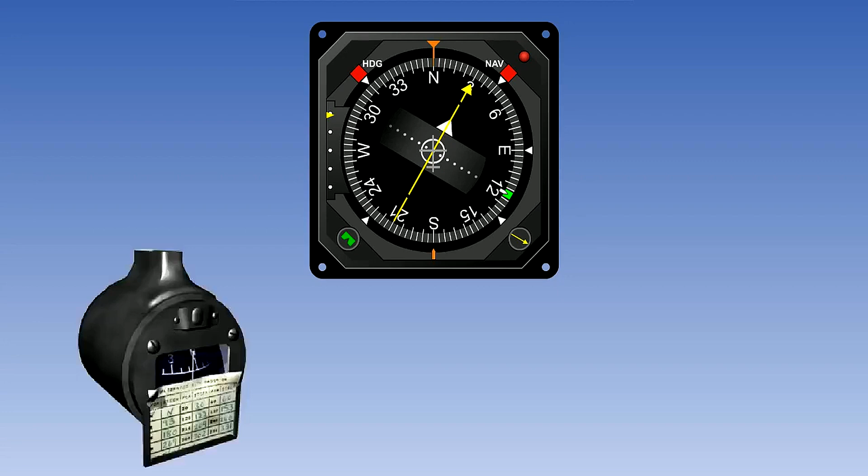This is the first of three lessons on the gyromagnetic compass. The gyromagnetic compass is an instrument which evolved out of the need to overcome the limitations of both the direct reading magnetic compass and the directional gyro indicator. We'll start by reminding ourselves of these limitations and then go on to see how the design of the gyromagnetic compass removes or eliminates them.

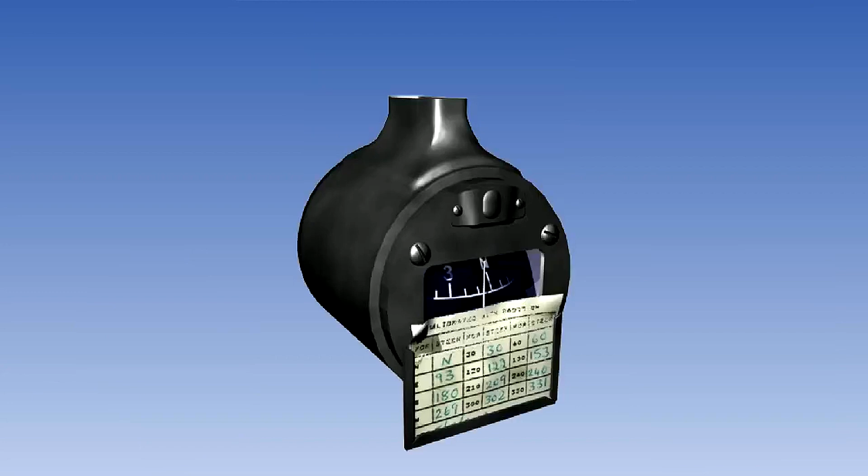The direct reading compass has three major limitations. These are: firstly, turning and acceleration errors. The compass cannot be read accurately during a turn.

Secondly, the magnetic sensing element, that is the group of magnets on the vertical card, is contained within the instrument and has to be situated close to the pilot so that the card can be seen. Unfortunately, the cockpit area is close to sources of deviation, such as electric lights, electric motors and ferrous metal.

Finally, it is a standalone system. The instrument is self-contained. It is not possible to take magnetic heading from it as an electrical or mechanical input into other equipment, such as those which display bearings from ground radio beacons, the autopilot and the flight data recorder.

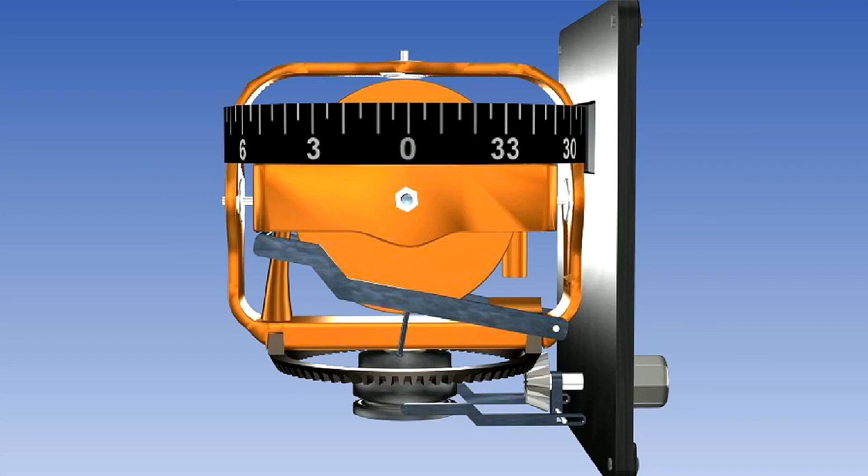The directional gyro indicator attempts to solve some of these problems by use of an air-driven or an electro-mechanical gyro. Turning and acceleration errors are eliminated and outputs can be taken to other equipment, for instance to display radio bearings. However, there is no magnetic input to the heading, and no correction except by the pilot manually synchronizing to the direct reading compass at regular intervals.

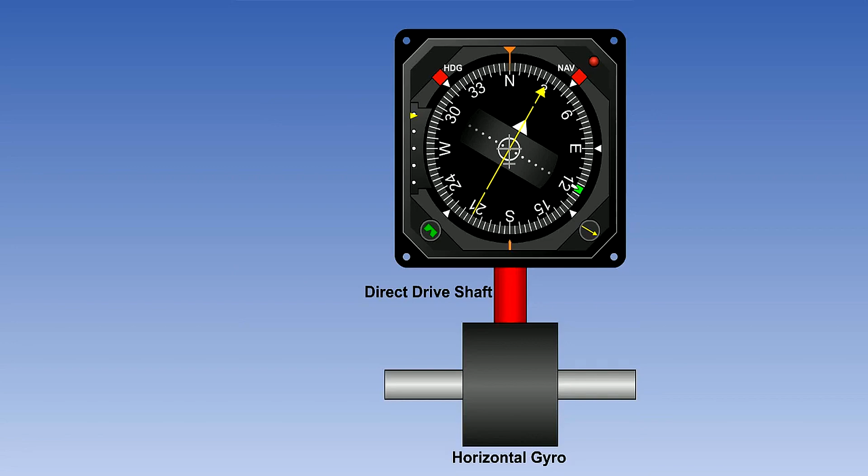What is required is a system which combines the best of both. The short-term rigidity of the gyro overcomes turning and acceleration errors. This needs to be combined with the longer-term monitoring of the Earth's magnetic field, so that if the gyro starts to drift, a servo system slaves it back to alignment with a magnetic input. Such a system is called a gyromagnetic compass.

The gyromagnetic compass is known by several names. It can be referred to as the gyromagnetic compass, remote indicating compass, slaved gyro compass, magnetic heading reference system. They all mean the same thing.

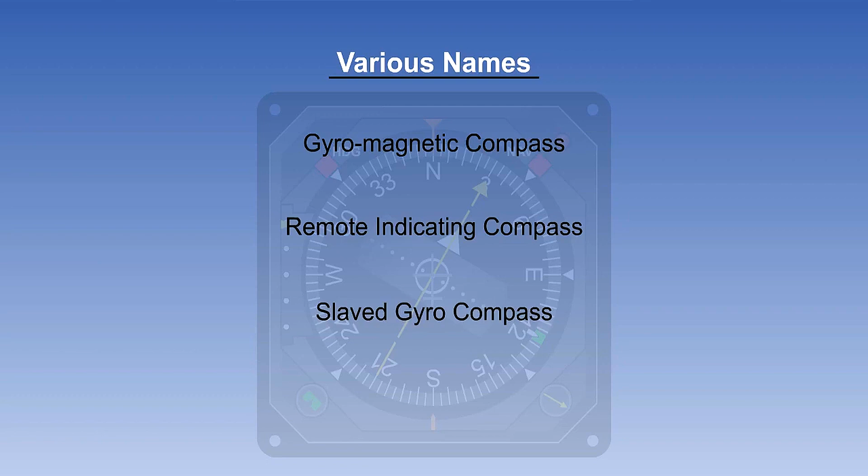A more modern version, which often includes other functions, such as the display of VHF omnirange, usually shortened to VOR, is known as the horizontal situation indicator, or HSI.

The system comprises the following elements: a magnetic detector unit. This is also often known as a flux valve or a flux gate. Note that it is usually mounted on a wingtip or on top of the fin and is therefore well removed from most of the sources of deviation.

A compass indicator dial. This is what most people refer to as the compass. A precession amplifier, this may also be known as a slaving amplifier. A precession motor, this may also be known as a slaving or synchronizing motor. And a horizontal gyro, similar in principle to the one used in the DGI.

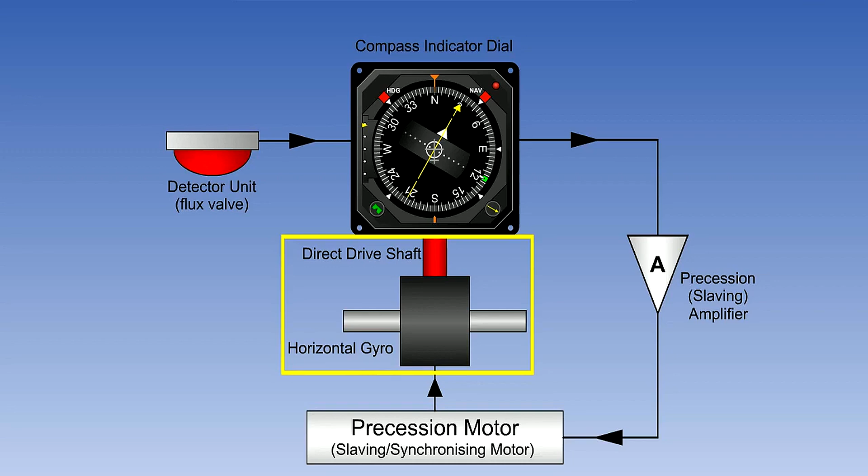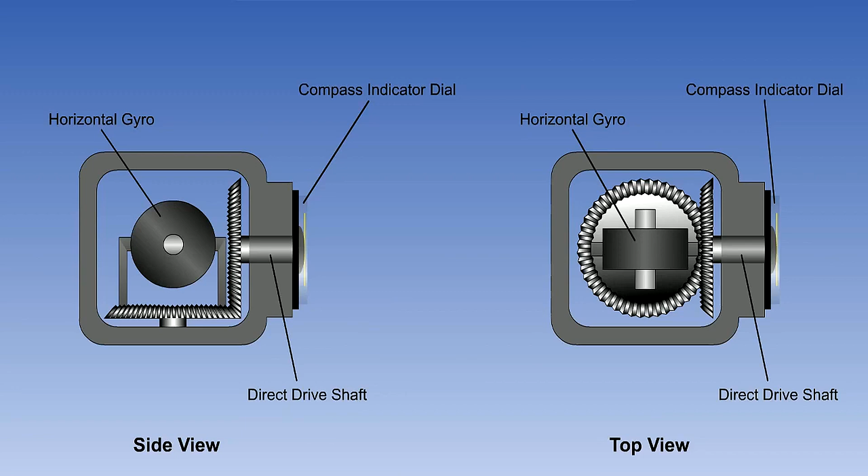In simple systems, the horizontal gyro is directly connected to the compass card of the indicator dial through two cogs, which change the rotary motion through 90 degrees. This is called a bevel gear, and it works like this. We are assuming our gyro is connected to the compass indicator dial by a bevel gear in the description which follows.

The purpose of the detector unit, or flux valve, is to sense the Earth's magnetic field and reproduce it within the compass indicator. We will explain how this is done later.

At this stage, we'll just say that magnetic heading has been detected electronically and passed to the indicator in the form of alternating current, or AC. We'll also assume that the compass has already been initially synchronized in order to make the gyro drive shaft output the same as the flux valve. Again, we'll cover how this is done later.

In the compass indicator box, the flux valve output is compared with the position of the gyro drive shaft. This is the shaft which positions the compass card indicator, that is the heading shown to the pilot. If the two are aligned, no further action takes place. The compass card is reading the right heading.

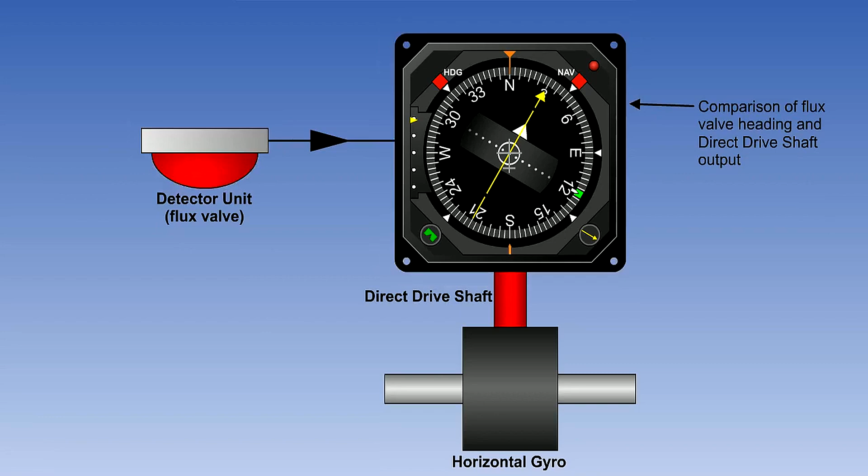We'll assume a steady heading, which gives a steady input from the flux valve. From this point, any difference between the flux valve field and the gyro alignment would only arise if the gyro were to drift. If this happens, the drive shaft will not be in alignment with the flux valve field, and an AC error signal is generated and passed to the precession amplifier, where it is amplified, phase detected and rectified to direct current, or DC.

The DC signal drives the precession motor, which turns the gyro. This gyro output is fed via the direct drive shaft to the HSI for comparison with the flux valve signal. If the two are aligned, the compass is synchronized and no further action takes place. If not, the error correction continues until the compass is synchronized.

We now have a system in which, if the gyro drifts away from the steady flux valve heading, it is brought back again by the precession amplifier and motor. We have explained the normal operation in terms of the gyro, which has a tendency to drift, being slaved to the magnetic detector unit.

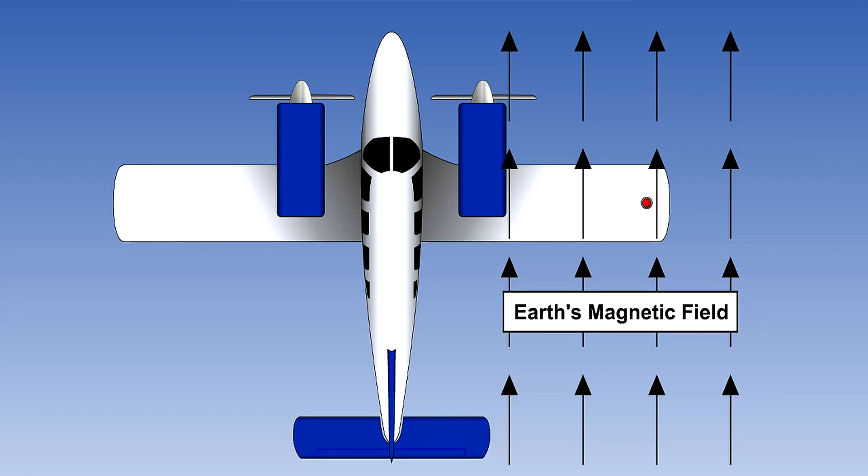However, there is also a smoothing of the signal the other way, because the magnetic flux valve signal itself is subject to short-term fluctuations, and the effect of these is reduced by the gyro. The magnetic field detected by the flux valve is generally stable over periods of tens of minutes or hours, but it can fluctuate for short periods of up to 2 or 3 minutes, particularly during accelerations and turns.

Suppose that for some reason the flux valve signal has temporarily introduced a small error. This will be compared with the gyro signal, and the error will be detected. The system has no way of telling whether the error is in the flux valve or the gyro, so the error signal will start to drive the gyro to follow the flux valve. However, the precession motor is designed to take the error out slowly, correcting the gyro at a rate of only 3 degrees a minute or thereabouts.

The gyro will therefore respond slowly to this short-term error. The error may well disappear before the gyro has turned significantly. If not, as soon as the flux valve signal is correct again, the gyro will follow it back to the correct value. So, because of the choice of precession rate of the motor, any small short-term flux valve errors are damped out by the gyro's slow response. We therefore have a system which combines the best of both sources: the short-term rigidity of the gyro and the longer-term monitoring of the Earth's magnetic field.

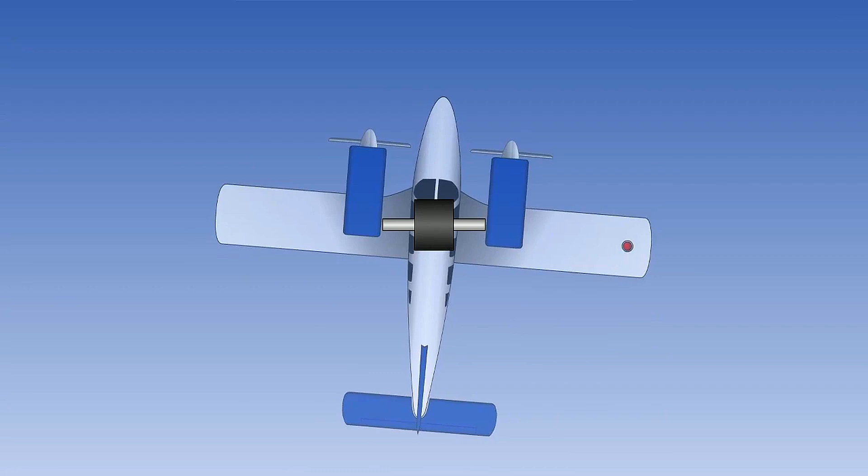Now consider what happens in a turn. We will assume initially that the gyro does not drift during the turn, which may well be the case, because even during a full 360-degree orbit at the standard rate 1, the turn will only take 2 minutes. The aircraft turns, but the gyro, having rigidity, does not.

This gives relative rotation between the horizontal gyro and the instrument case, and so operation of the bevel gear causes the direct drive shaft to rotate, changing the heading indication on the compass card. However, at the same time, the heading sensed by the flux valve, which is being passed to the drive shaft for comparison, is changing at the same rate. Therefore, no error signal is generated, and the compass should remain synchronized during the turn.

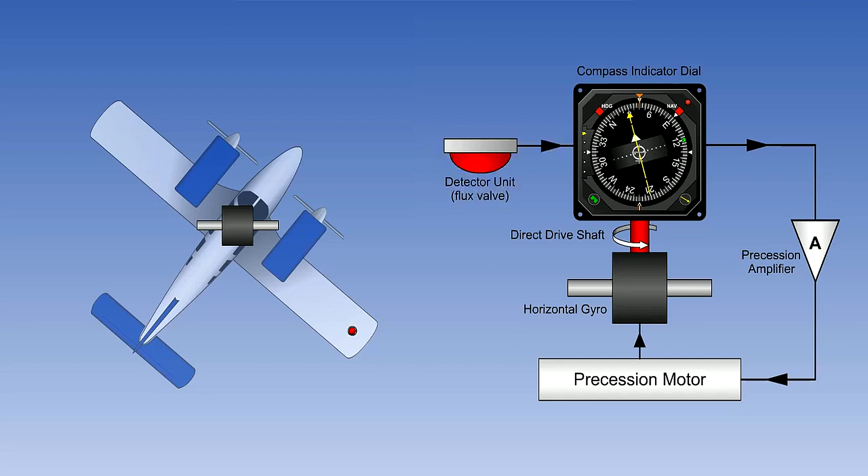If, in fact, there is some gyro drift during the turn, on completion of the turn there will be a small error signal. This will be taken out, as described previously. The use of a slow precession rate gives us a problem at startup.

On initial switch on, the alignment that the gyro takes up is random and is unlikely to be in synchronization with the Earth's magnetic field. Therefore, an error signal is detected. The problem is that the precession motor's normal correction rate is designed to be only 3 degrees per minute, in order to smooth out short-term fluctuations.

If the gyro happened to be 90 degrees out, it would take 30 minutes to synchronize, which is obviously unacceptable. The solution is to have a rapid synchronization facility. This can either be a mechanical clutch operated by the pilot, as in the DGI, or, in later compasses, a high-gain mode with the precession amplifier, similar in principle to rapid erection in the electric artificial horizon.

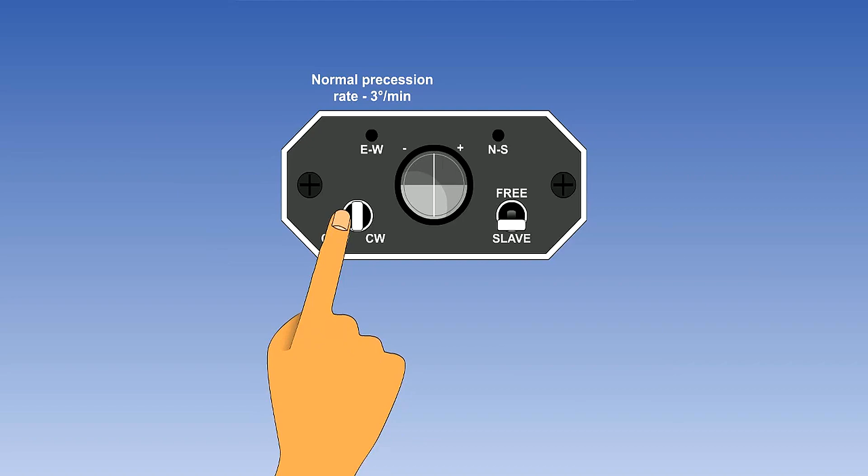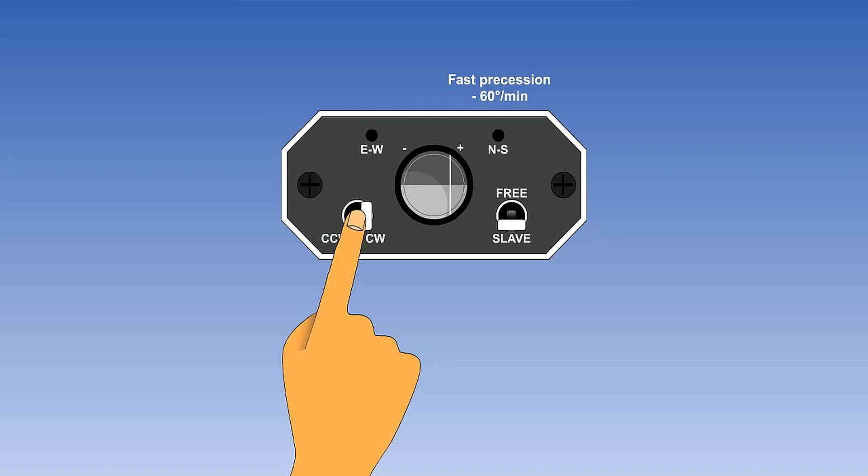This is operated by a two-position switch, spring-loaded to the normal position, which has to be held against the spring for rapid alignment. Operation of this switch increases the precession motor's correction rate so that synchronization takes only a few seconds. More modern compasses are even more automatic. If a large error is detected, fast precession takes place at typically 60 degrees per minute until the error is zero, then the system automatically reverts to the slow smooth precession rate of typically 3 degrees a minute. We therefore have to modify our original block schematic to include the rapid synchronization facility.

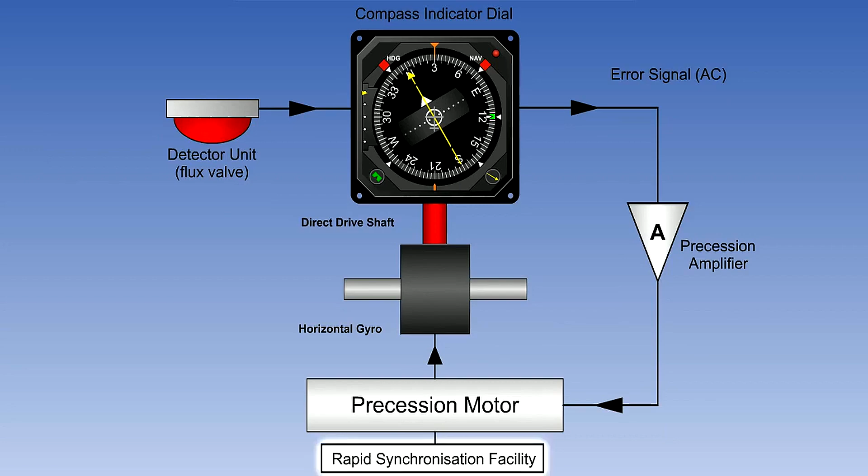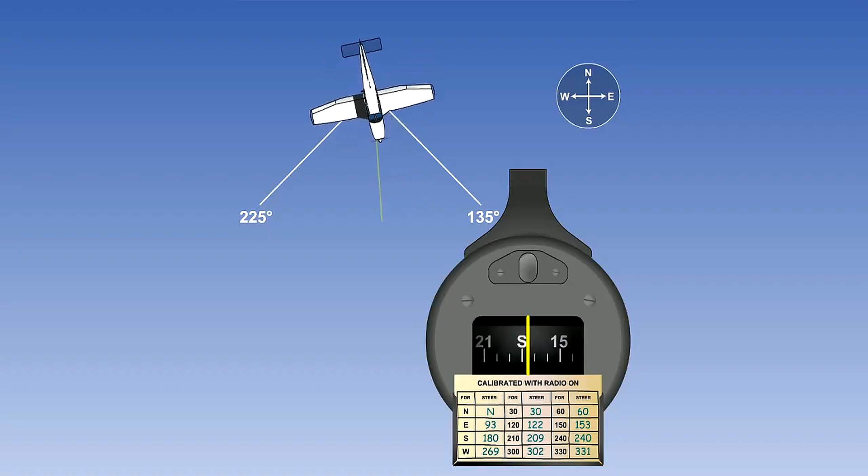We still have 2 more lessons to come on the gyromagnetic compass, one on the flux valve and the other on the remaining components. But let's summarize what we've covered so far. The direct reading compass suffers from turning and acceleration errors. It is situated close to the pilot, but also to sources of deviation, such as electric lights, electric motors and ferrous metal, and is a self-contained instrument. It is not possible to take magnetic heading from it as an electrical or mechanical input into other instruments.

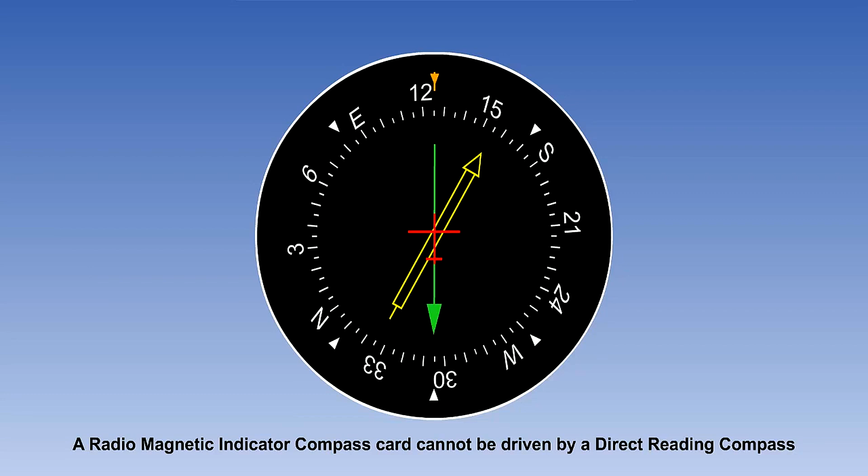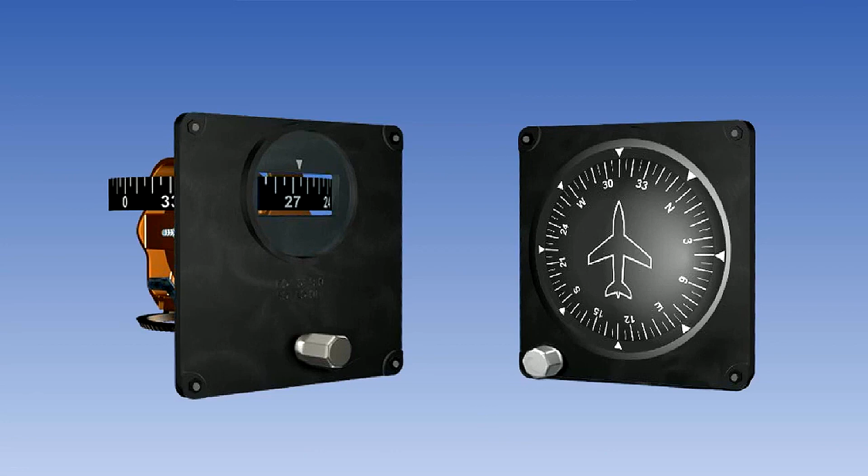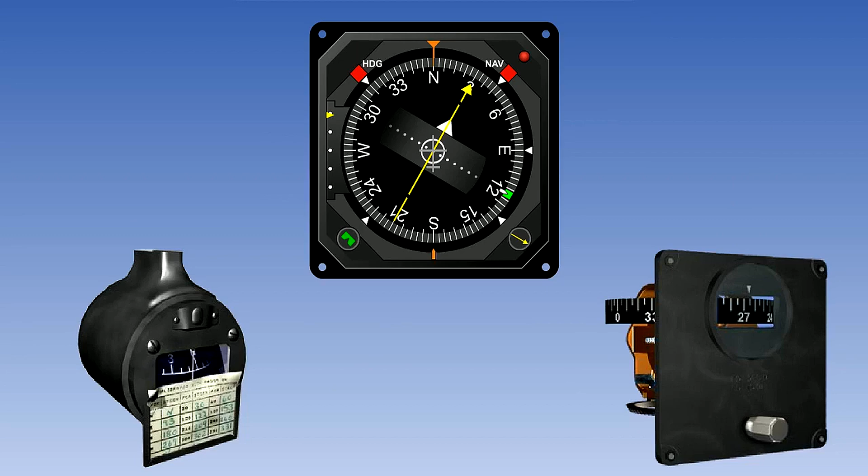In the directional gyro indicator, turning and acceleration errors are eliminated and outputs can be taken to other equipment, but there is no magnetic monitoring. We therefore have a system which combines the best of both sources, the short-term rigidity of the gyro and the longer-term monitoring of the Earth's magnetic field. We looked at all the basic components.

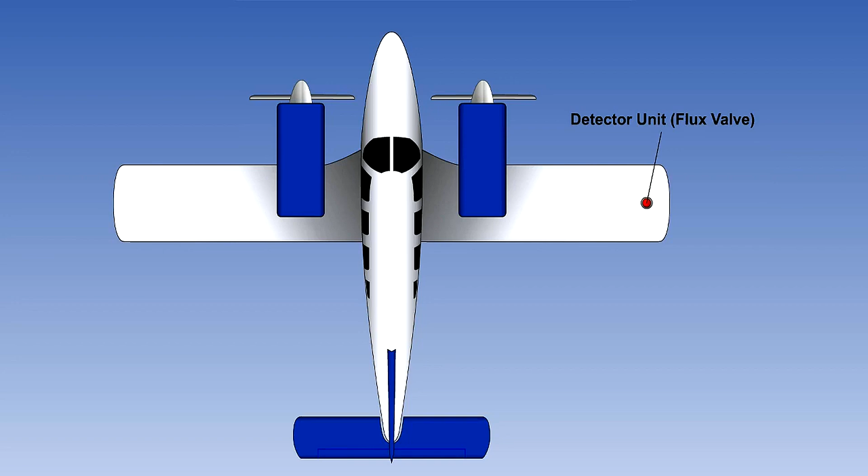This system has several advantages over the direct reading compass and DGI. Firstly, the flux valve is usually mounted on a wingtip or on top of the fin and is therefore well removed from most of the sources of deviation. On initial switch on, the gyro is brought into alignment with the signal detected at the flux valve. From then on, the outputs of the gyro and the flux valve are compared.

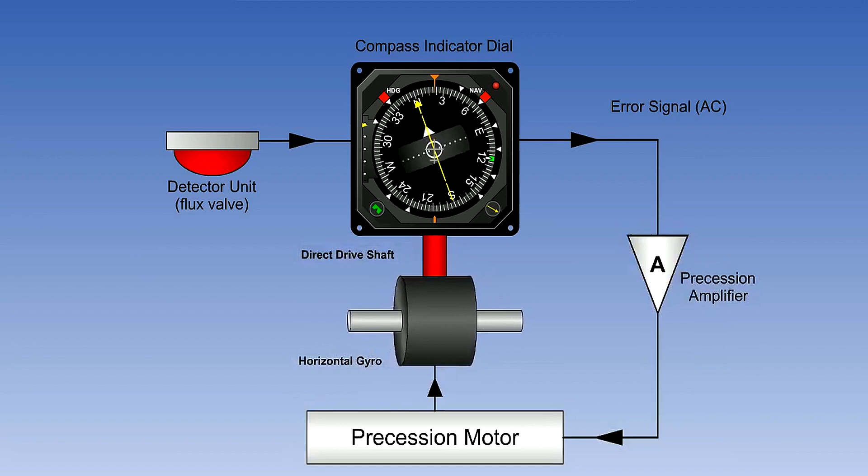If there is any error, the gyro is precessed into alignment with the flux valve by the precession amplifier and precession motor. This overcomes the normal gyro drift. The flux valve on its own would still suffer from turning and acceleration errors, but sending the signal via the gyro gives stability and rigidity.

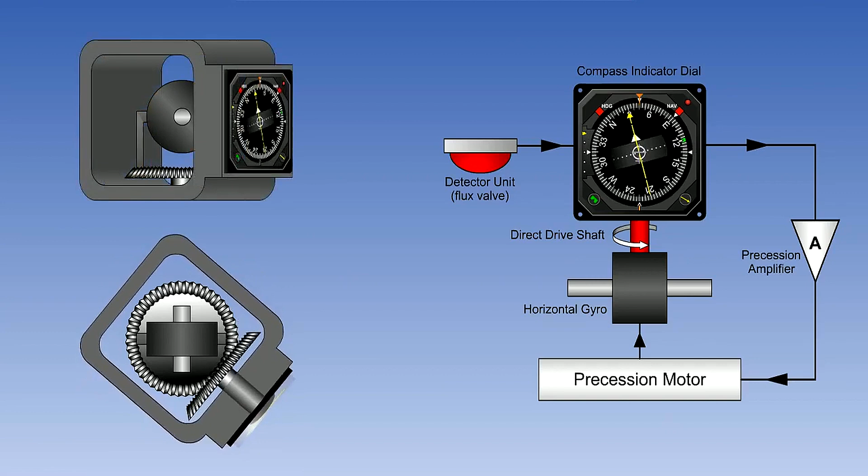Because the precession motor applies corrections to the drive shaft at the rate of approximately only 3 degrees per minute, in a turn, both the flux valve and the gyro shaft turn at the same rate, so there should be no significant error at the end of the turn. If any error is generated in the turn, it will be small and is precessed out in the normal way after completion of the turn.